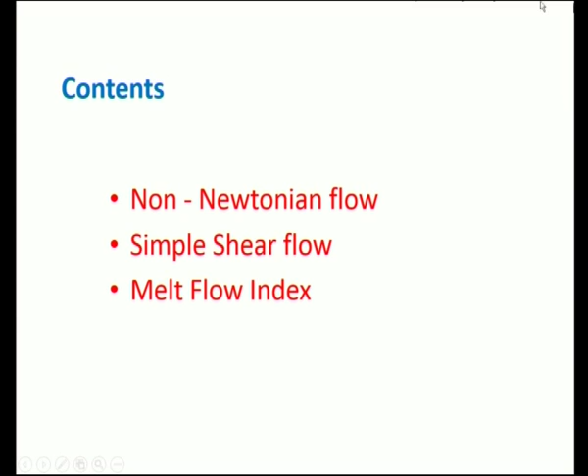In today's episode, we will discuss what is meant by non-Newtonian flow, simple shear flow and melt flow index. What is meant by non-Newtonian flow? Why is non-Newtonian flow important for polymeric systems? Because most polymer systems do not follow Newtonian law.

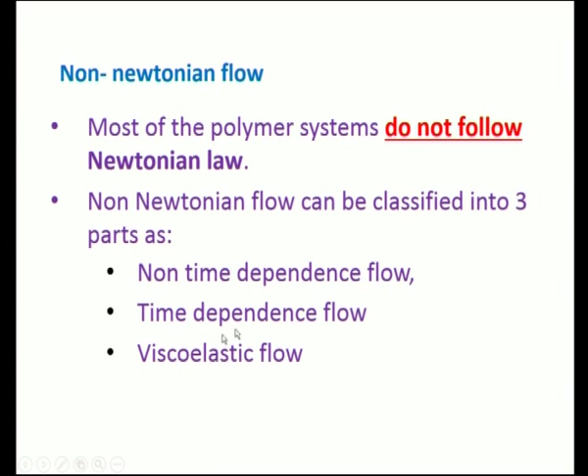What is Newtonian law? Newtonian law states that the relationship between velocity gradient and shear stress is linear. For non-Newtonian fluids, there is no linear relationship between velocity gradient and shear stress. Non-Newtonian flow can be classified into non-time dependence flow, time dependence flow and viscoelastic flow.

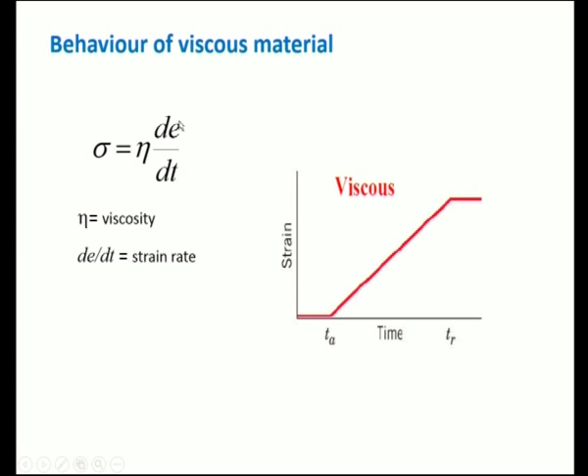How will a normal viscous material behave? When you plot strain versus time for a viscous material, there will be a linear increase like this, which is characterized by the viscosity. This is the applied stress, this is viscosity, and this is the strain rate. This is for a normal viscous material.

What are all the features of a normal viscous material? At low strain rate, it is exactly a linear curve as seen in the previous curve. It is a simple Newtonian relationship and it totally depends on time, and stress is a direct function of strain rate and also stress independent of strain.

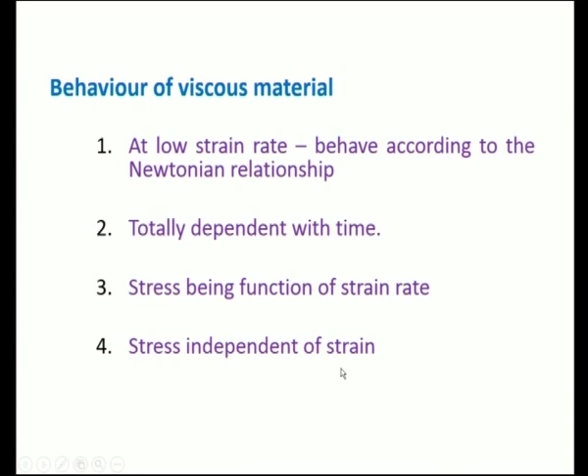What is a non-time dependence flow? In non-time dependence flow, the shear rate can be represented mathematically by the shear stress as gamma, which is the shear rate, a function of shear stress. In rheological studies, there are 4 types of flow that do not depend on time: Bingham body flow, pseudoplastic flow, Newtonian flow, and dilatant flow.

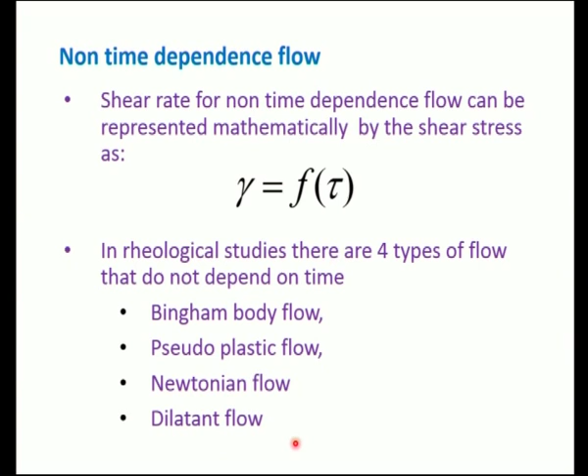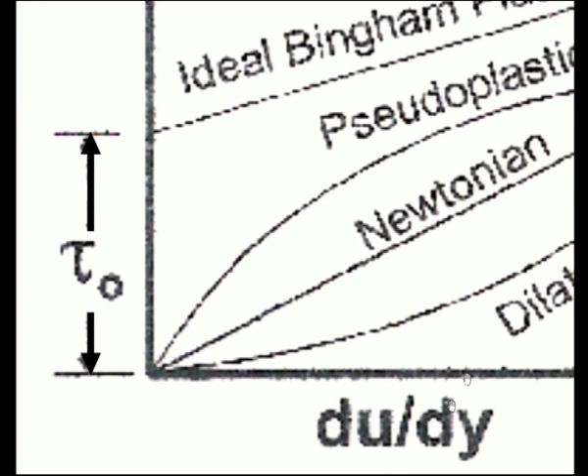A typical shear stress versus velocity gradient curve for non-time dependence flow is as shown. In the y-axis you have the applied stress and in the x-axis the velocity gradient. There is a linear relationship shown as Newtonian, and then pseudoplastic and dilatant.

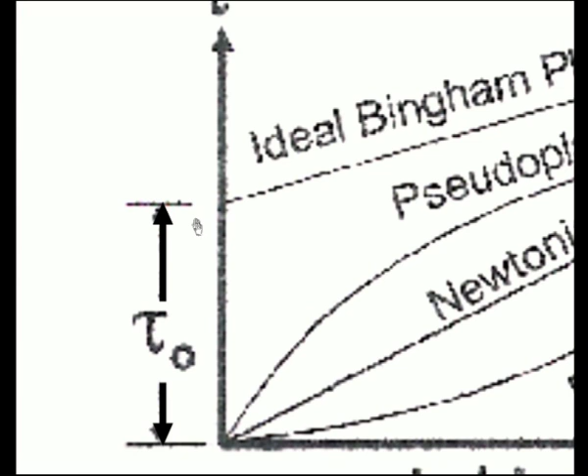In Bingham plastic flow, it has a threshold stress represented as tau naught. Up to tau naught, there will not be any flow. Once the applied stress is greater than tau naught, then the Bingham plastic flow starts flowing.

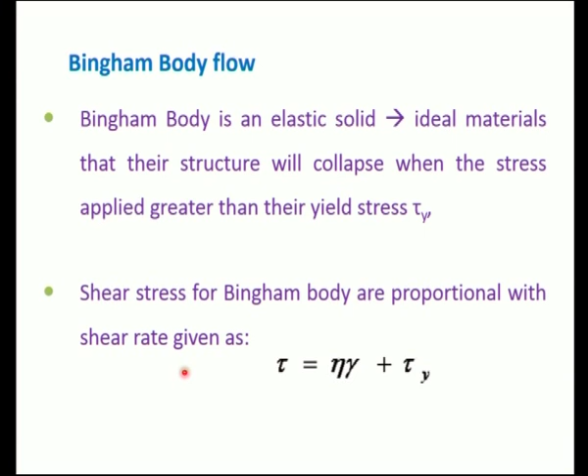First we will see Bingham body flow. Bingham body flow is an elastic solid in which the structure will collapse when the stress applied is greater than the yield stress or threshold stress. Therefore, shear stress for Bingham body can be represented mathematically as shear stress equal to the sum of viscosity multiplied by shear rate plus the residual stress or threshold stress.

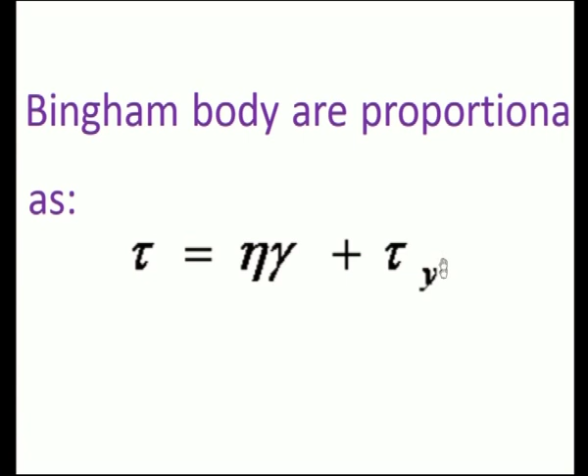Materials that represent Bingham body flow include emulsions, suspensions with high concentration. Typical examples are paint, printing ink, clay, slurry solution, and plastic emulsions.

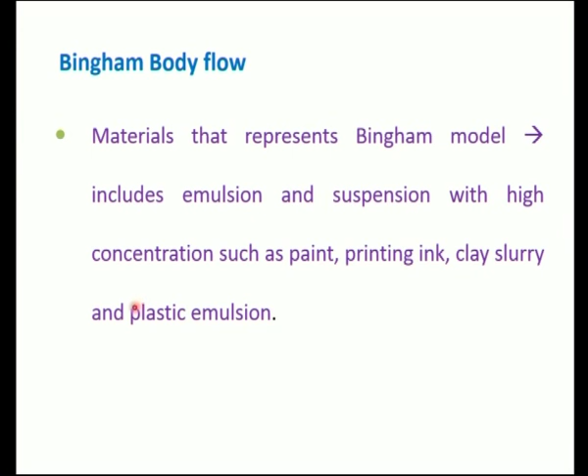Next, we will move on to pseudoplastic flow. In pseudoplastic flow, the main property is shear thinning, which means with the increase in shear rate, the viscosity starts decreasing. This is called shear thinning, which is an advantage when we convert a raw material into a useful product, either in an extrusion molding machine or an injection molding machine. Therefore, during real processing that involves a high range of shear rate, there will not be any problems for the plastic melt to flow.

What happens at suppressed conditions is that molecules have higher entanglement, and can have random conformation or orientation also.

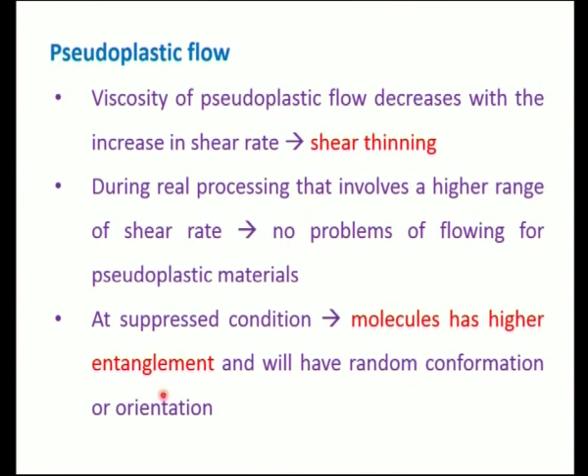Once with the increase in shear rate, these entanglements will go away and this orientation takes the direction of flow, and therefore it enhances further flowing. So this is what happens in pseudoplastic flow. Under the application of a shear force, uncoiling of the molecular chain will occur and the orientation of the molecule increases. Even though Brownian movement is present in the material before the applied shear force, once the shear force is applied it will overcome this Brownian movement and hence facilitate better flow.

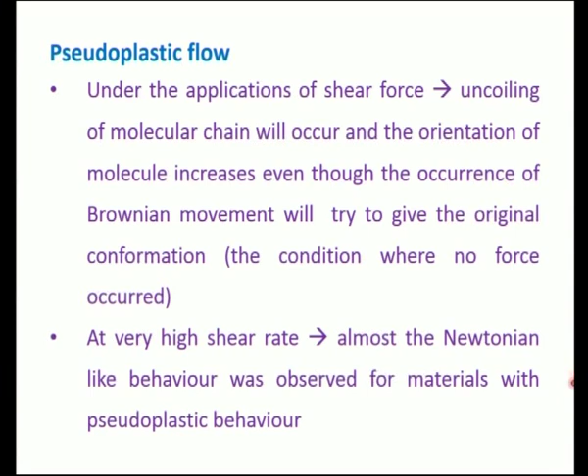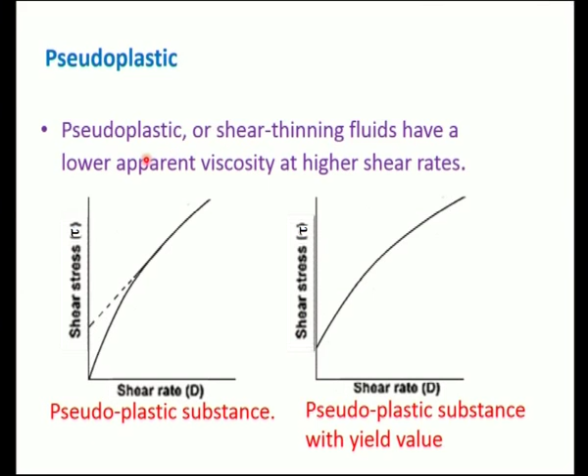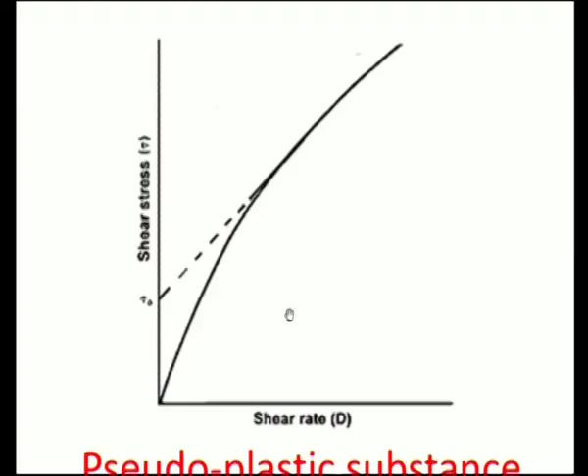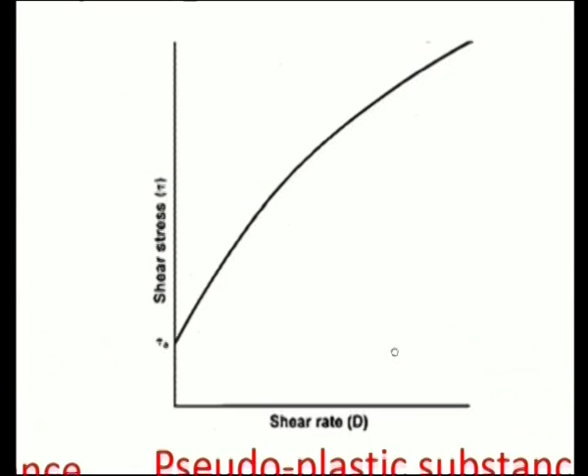This is a typical rheogram for a pseudoplastic substance, shear stress versus shear rate, and this is a typical rheogram for a pseudoplastic substance which does have some residual stress.

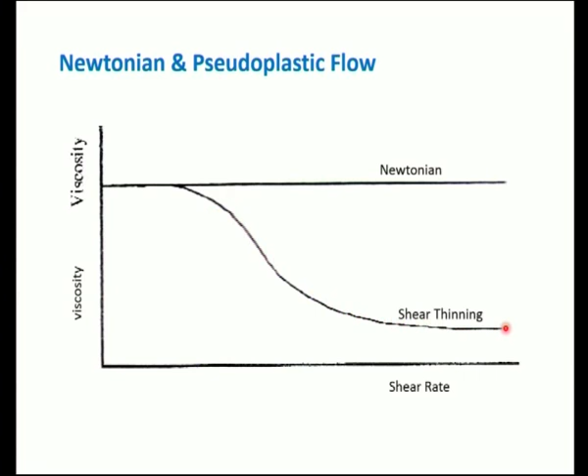This is a typical relationship between Newtonian and pseudoplastic flow, in which at low shear rates you could find the pseudoplastic curve has a similar shape with respect to Newtonian. To start with, the viscosity is very high for a pseudoplastic flow, it is almost here. Once the shear rate increases, the viscosity gradually comes down and becomes similar to a Newtonian flow.

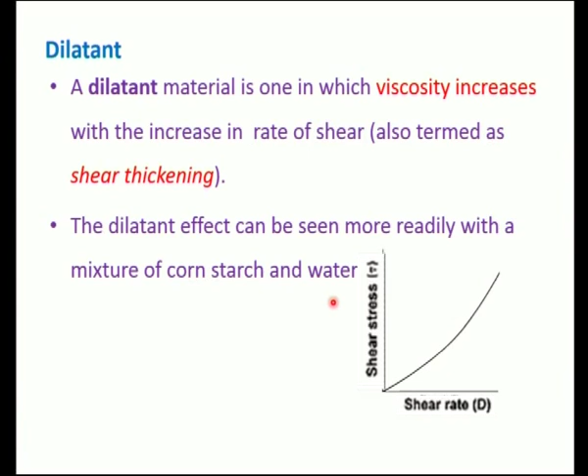Next, dilatant material. Dilatant material is just opposite to pseudoplastic flow, in which viscosity will actually increase with increase in rate of shear, which is called shear thickening, an unwanted effect with respect to polymer processing. But this dilatant effect can be readily seen with a mixture of cornstarch and water, which is a typical example, and some biopolymers also exhibit this dilatant behavior.

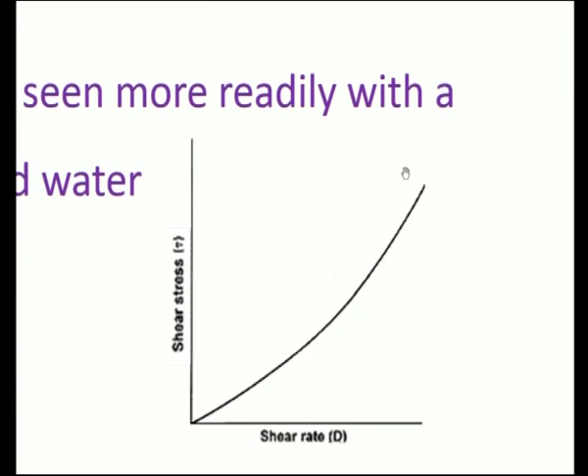A typical dilatant curve is shown, shear stress versus shear rate, where the viscosity starts increasing and the curve goes up and up. Dilatant behavior is normally seen in polymers with high suspension, such as PVC, a typical example for dilatant flow. Therefore, when we want to process PVC, a plasticizer is added which tries to reduce this dilatant effect. These are materials that are difficult to compress under high shear rate.

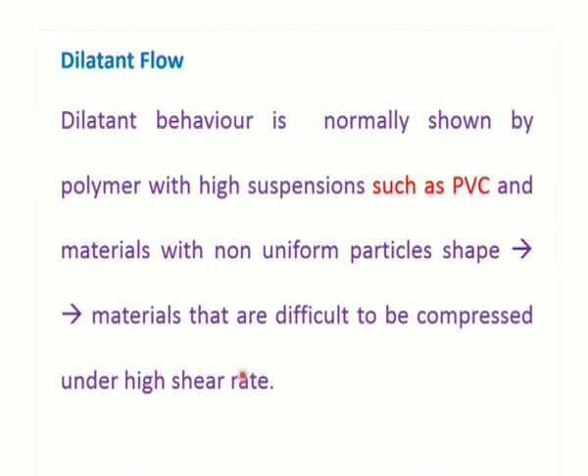Next we will move on to time dependent flow. What is meant by time dependent flow? Time dependent flow is, with the increase in shear rate and with the increase in time, how the viscosity changes, and that is going to affect the flow properties.

These flow properties that depend on time will also depend on the type of shear flow, whether it is Newtonian or non-Newtonian. In non-Newtonian flow you have pseudoplastic or dilatancy behavior. In the first episode we have seen about thixotropy. In all these, the nature of the shear flow has an effect on the flow properties.

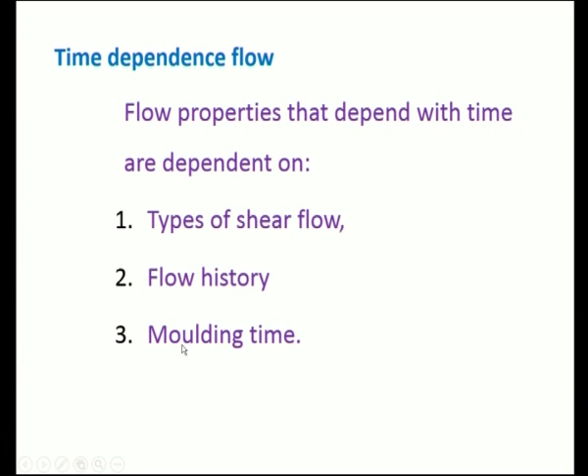And then the flow history. The flow history refers to the velocity profile, whether it is going to have a parabolic form or a very flat flow form. Likewise, in processing, the molding time is again very important. The rheological study data and the molding time are taken into account before choosing a particular processing method for converting polymeric raw materials into a useful product.

First we will see what is meant by viscoelastic flow. What is viscoelastic flow? Visco meaning viscous, and then elastic.

Polymers are good examples for viscoelastic flow. Why polymers? Because the time constants for flow are of the same order of magnitude as their processing times for either extrusion molding, injection molding, or blow molding. What is time constant for flow? For example, you have first order systems, second order systems - any polymeric processing operation like extrusion molding or injection molding can be modeled either as a first order system or a second order system.

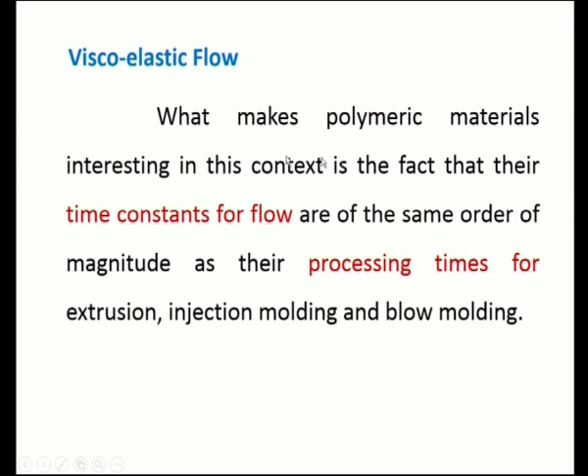In a first order system you have one time constant, for a second order system you have two time constants. This time constant and the processing time have a direct relationship, or the magnitudes are of the same order for a polymeric system. In very short processing times, the polymer may behave as a solid, while in long processing times, the material may behave as a fluid.

Short processing time refers to short molding time - the time it takes, molding time, is the time the resin takes to fill the mold before it is ejected out as a final product. So therefore, in short processing time, the polymer has to behave as a solid.

In long processing time, the material may behave as a fluid, which refers to the extrusion machine, where you have three sections: feed section, metering section, and extrusion section. In the feed section, the polymeric raw materials in the form of pellets or powders are fed in. In the metering section, these materials are converted into a fluid, which takes a long time for conversion from solid to liquid. That is what is referred to as long processing time.

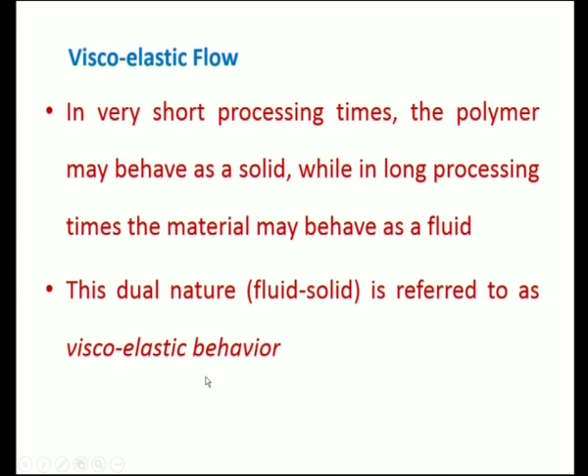This dual nature is referred to as viscoelastic behavior, which is very typical of polymeric processing. In viscoelastic flow, the dominant behavior is of course the viscous behavior. Once the applied stress is removed, it slowly deforms, and therefore there is an elastic recovery after the removal of the applied stress. This viscoelastic flow has properties in between solid and liquid behavior.

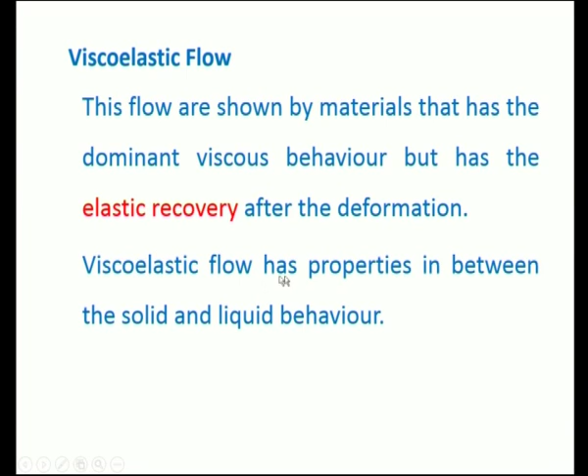Typical viscoelastic behavior - the polymer is called viscoelastic because it exhibits both elastic as well as viscous, also called plastic, elastic and plastic behavior. Plastic behavior refers to a high viscous flow, and elastic behavior refers to a solid-like flow.

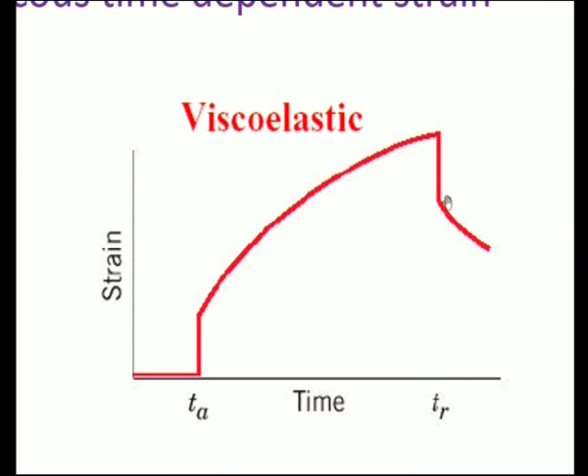A typical strain versus time curve for a polymeric system is as shown. At a specified time, for example time T sub A, there is an instantaneous increase in strain which is elastic. Then the strain increases gradually - that's plastic - then it goes down. This instantaneous elastic strain followed by viscous time-dependent strain is what we call viscoelastic behavior, which is very typical of polymeric systems.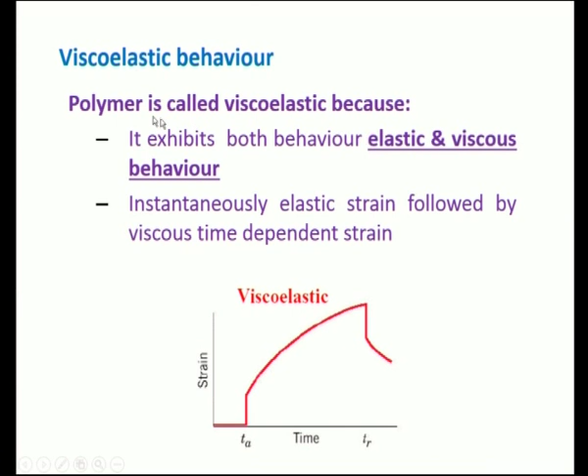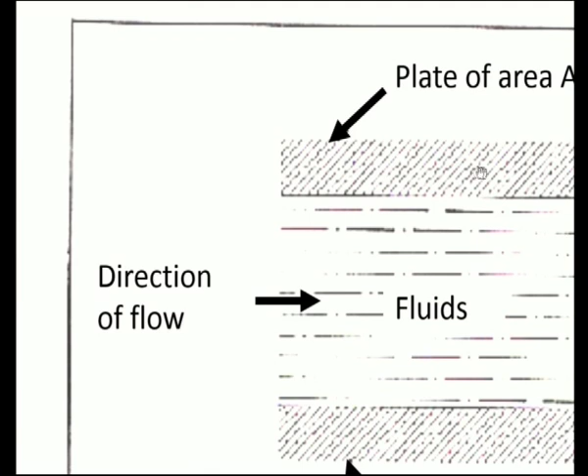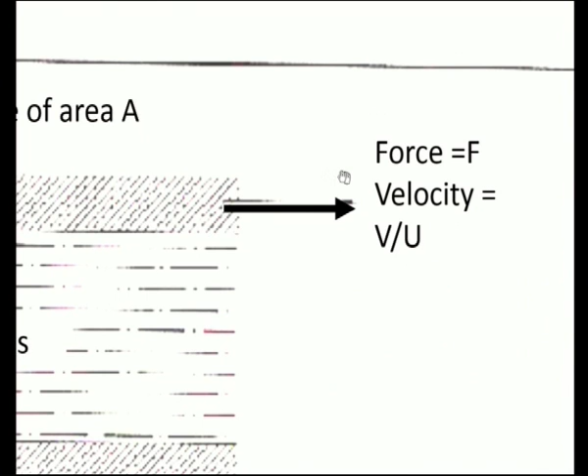Next we will move on to simple shear flow. In simple shear flow, consider a fluid in between two plates of area A. The direction of flow of the fluid is also as shown. Now a tangential force F is applied to the top plate, which will result in a velocity. This will cause a displacement of the fluid, and h is the distance between the separation of the plates, which is simple shear flow.

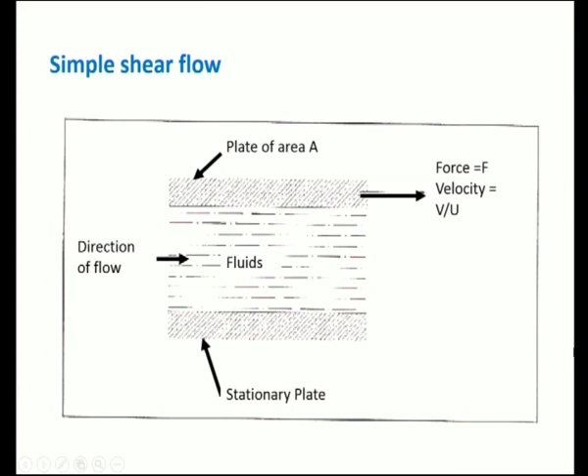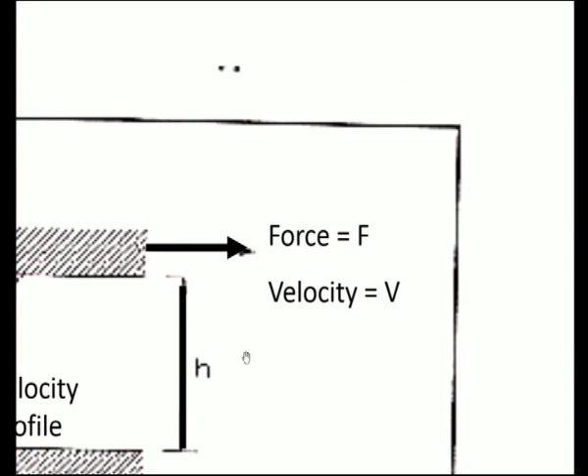In simple shear flow, once the tangential force F is applied, this results in a velocity V which causes the top plate to move. Remember the bottom plate is stationary. This results in the layer just adjacent to the fluid particles displacing in the pattern shown, but at the bottom plate the displacement is zero. As a result, you see a series of layers - this is what we call the velocity gradient - with velocities V1, V2, V3, V4, V5, V6 and so on, down to zero velocity at the bottom. This one represents maximum velocity and this one represents zero velocity. Therefore, there is a specific velocity gradient that is being developed.

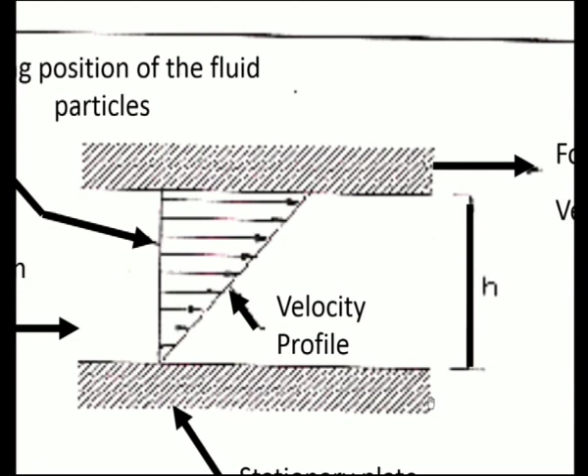In shear deformation, a force F is applied as shown in the figure. The top layer is displaced by, for example, U. The relative displacement of the two layers is what we call simple shear strain, gamma. U is the displacement - U refers to the maximum change in position - and H is the distance of separation of the plates. This relationship is what we call shear strain. Because it is in the tangential direction, it is called shear force.

Because of the shear force, a shear strain occurs. Now what are the factors affecting shear flow?

First one is the temperature. Flow occurs as a result of polymer chains sliding over each other. The ease of flow will depend on the mobility of the chains and the entanglement forces holding them together.

As we discussed in the first part, any polymeric sample is composed of a number of chains, and each chain will have different chain length because of the number of molecules attached to it. Once the polymer is prepared, that is, converted from monomer to polymer, and then once a flow occurs, it depends on this mobility of the chain, how well one chain can slide over another, and all these chains at normal stage are more entangled, and this entanglement force holds them together.

These two will go away once you increase the temperature. An increase in temperature will result in greater mobility, and hence the viscosity will go down. For simple low molecular weight Newtonian fluids, the viscosity will have an inverse relationship. That means once you increase the temperature, the viscosity will go down.

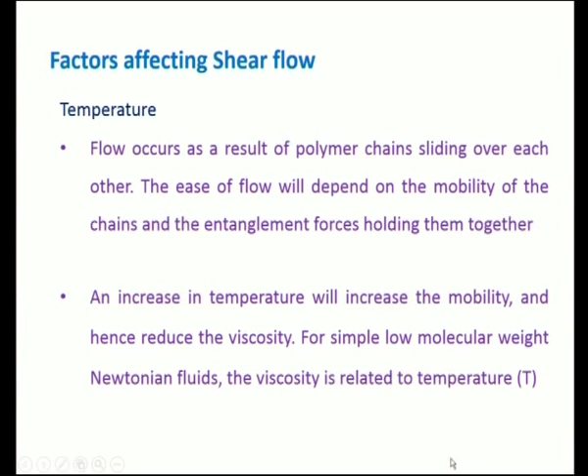Next, pressure. In all these discussions so far, we have assumed that polymer melts are incompressible. That means there is no effect due to pressure, which is a normal or reasonable approximation for most applications. However, there are some evidences with respect to injection molding where high pressure values are possible, even up to 150 megapascal pressure developed in a typical injection molding process.

So this increase in pressure will restrict the mobility of the polymer chains, and hence it will increase viscosity. This pressure will have effect with respect to viscosity only for specific processing methods like injection molding. For most other applications like extrusion molding, the pressure effect is negligible.

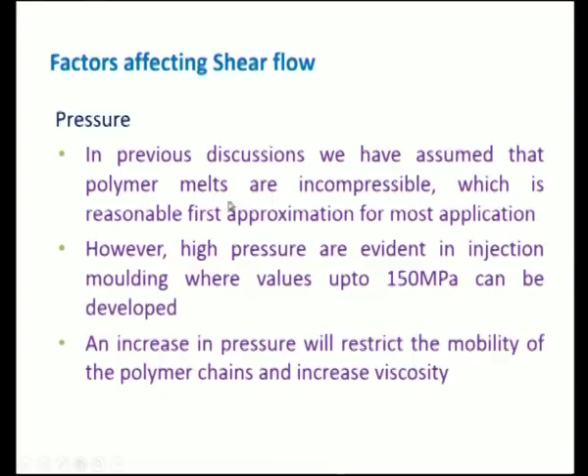Of course, the next factor that affects shear flow is the molecular structure. Molecular structure is the single most important parameter which will have a direct effect on polymer rheology. Polymer chains are assumed to be highly coiled in the equilibrium state.

That is, at the normal state, there are high degrees of both inter and intra chain entanglement, that is entanglement with respect to the single chain as well as entanglement with respect to the neighboring chains. These are at a high degree or high state. The coiling and the entanglement will be at the maximum state when the polymer is at rest.

Now when a stress is applied, the chain tends to become aligned and disentangled. Once you apply the stress, it is like a coiled wire. Once you try to uncoil the wire, it may straighten up. The similar case applies with respect to polymeric chains.

Once a stress is applied, these chains tend to become aligned in the direction of application of force, and they get disentangled. This will facilitate slippage of the chains, that is one chain will slide over another, and an individual molecule is able to drag others along because there is no entanglement. One chain when attached to another, as one starts moving, the next chain will also move. As a result, with respect to the external stress, there will be easy flow with increase in stress.

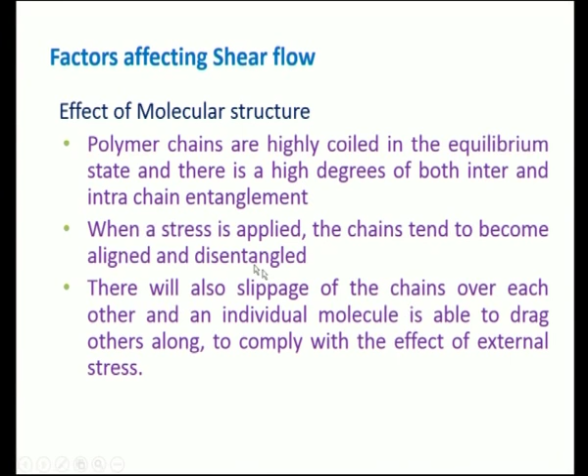Now the instruments for rheology measurements. A very popular type of instrument to measure viscosity is the capillary rheometer or viscometer. Its function under conditions of load and force is constant, or at a constant volume rate.

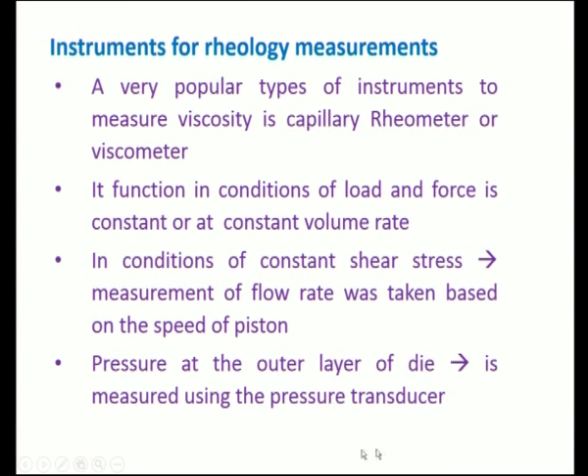Under conditions of constant shear stress, measurement of flow rate was taken based on the speed of the piston. Pressure at the outer layer of the die is measured using the pressure transducer. This is one way to measure viscosity.

The next common method for rheological studies is of course the melt flow index. Any polymer processing industry will have a melt flow index. In fact, when you want to prepare a plastic chair or a plastic cup or any plastic product, you want to choose either polyethylene or polypropylene.

Melt flow index is an analysis method that determines the ease of flow of plastic materials. Melt flow rate depends on molecular weight and of course the type of additives being added. The melt flow index value allows for direct comparison of materials to each other.

For an R&D engineer, when a number of plastic materials are available, based on the melt flow index value, one can choose which one is good for a given type of application as well as a given type of processing method.

There are two standard methods that have to be adopted: American Standard Test Methods D1238 and International Standards Organization 1133. These are the standard test methods accepted worldwide. The melt flow index value has to be evaluated based on these two methods. The ASTM D1238 method we will see in the next slide.

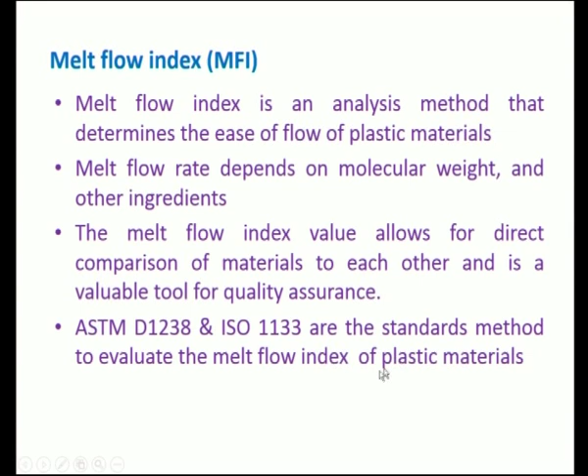Before that, what is meant by melt flow index? The melt flow index refers simply to the extrusion of a thermoplastic material through a very small orifice of specific length and diameter, under prescribed conditions of temperature and load. In the American Standard Test Methods D1238 and International Standards Organization 1133, these are the standard methods to evaluate the melt flow index of plastic materials. These methods are accepted worldwide.

The extrusion - next the definition for melt flow index: the extrusion of a thermoplastic material through an orifice of specific length, diameter, and prescribed conditions of temperature and load. This is where the standard methods have been evolved by American Standard Test Methods, which is followed worldwide.

By this method, they will prescribe, for example for polypropylene, what is the temperature - a typical value is 230 degrees Celsius, which you have to maintain if you want to find the MFI value for polypropylene. Similarly, the load - whether you have to maintain 1 kg load or 2 kg load - and then what should be the length of the orifice through which the polymer is extruded, and what is the diameter of the orifice through which the polymer will pass through.

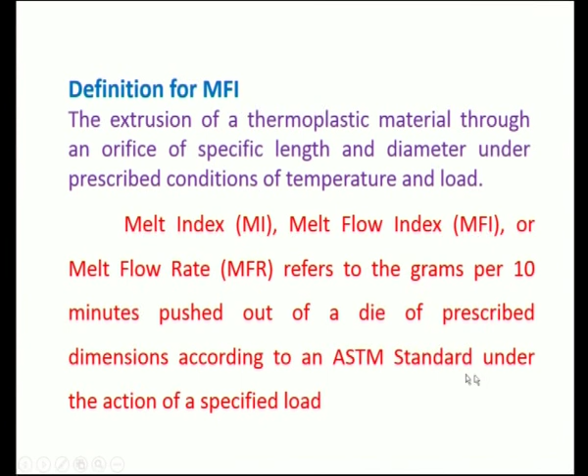In other words, it is also called melt index, melt flow index, or melt flow rate. All these refer to MFI, collectively called MFI. It simply means how many grams are extruded per 10 minutes, pushed out of a die of prescribed dimensions according to an ASTM standard, under the action of a specified load.

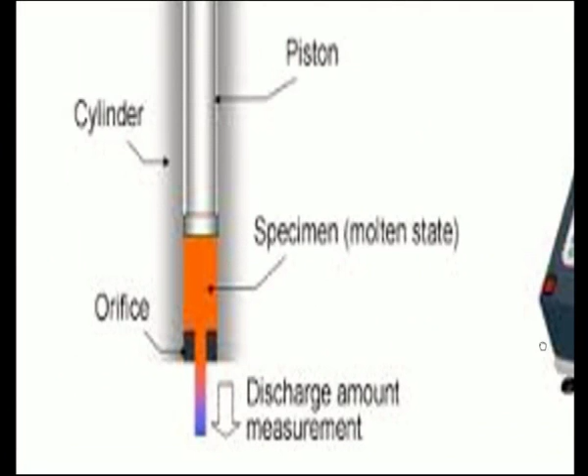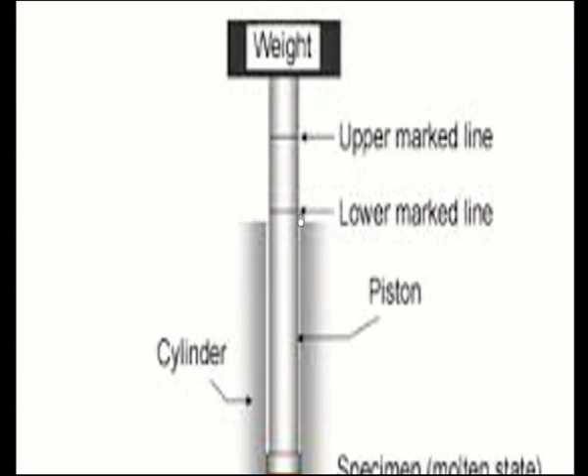This weight is as per the ASTM standard - either 1 kg or 2 kg of weight is applied - and then the piston moves from this point to this point. This is the cylinder through which the polymeric resin will flow, and this is the orifice. They will collect the polymeric resin that is extruded through this for 10 minutes, and then weigh it. So, for example, 10 grams per 10 minutes means the MFI value for that material is 10.

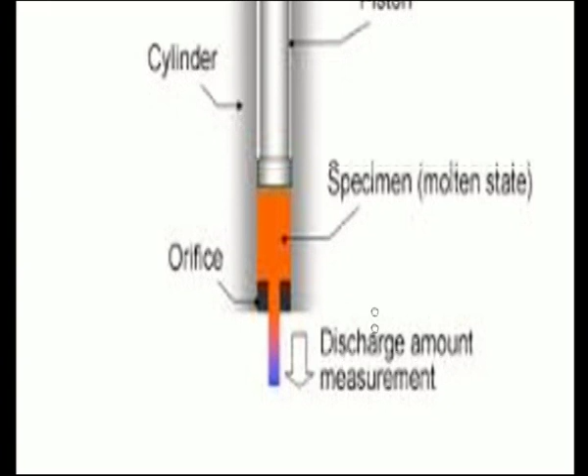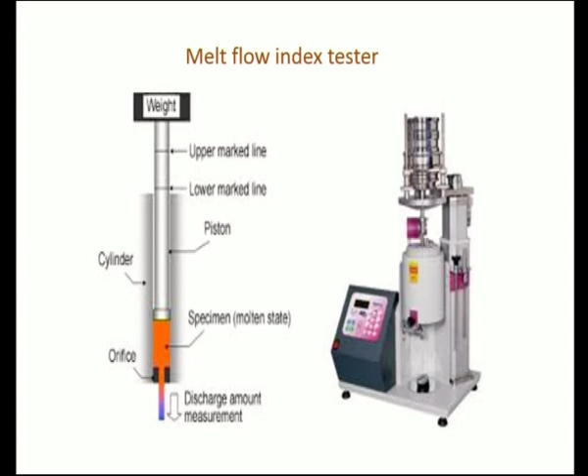A high MFI value is usually good for processing. A low MFI value means sufficient care has to be taken with respect to processing equipment.

Summary: in today's class we have discussed non-Newtonian flow, simple shear flow, and melt flow index. Non-Newtonian flow is the basis for polymer rheology. Why is polymer rheology important? Because all the polymeric resins, either in pellet or powder form, have to be melted and then passed to a mold, and converted into a useful product. That is where non-Newtonian flow and simple shear flow are important.

These polymeric resins are frequently sold in the market on the basis of density and melt flow index value. However, this melt flow index is just one point on a viscosity curve - the apparent viscosity. Plastic extrusion also involves shear rates usually up to 1000 inverse seconds, and viscosity measurements are called for to determine the shear thinning behavior.

Shear thinning behavior is typical of polymeric systems, because all polymeric systems exhibit pseudoplastic behavior. In pseudoplastic behavior, with increase in shear rate, the viscosity goes down, which is shear thinning.